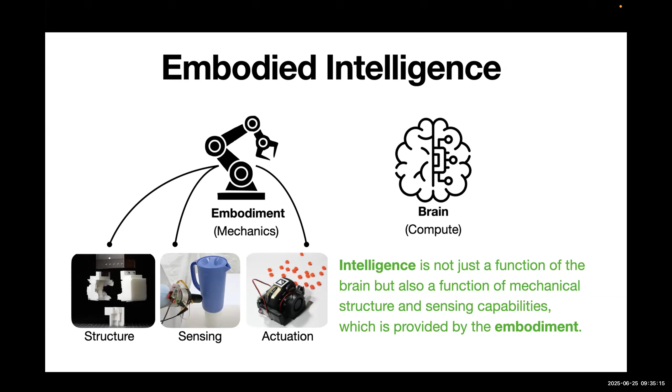So all these other capabilities are actually provided by embodiments, not by the software. And I think the intertwined nature of all these different components makes robotic systems so hard to design and optimize, right? That is why robotics is so hard and we are not solving it yet. So how do we typically approach it? I think the standard tactic for approaching robotic system design is this divide and conquer approach, right? We have a very complicated system. We divide it into different components, and we focus on each component at a time.

And that directly leads to the different specializations in robotics. We have mechanical engineers who learn how to design the physical part of the robots. We also have CS people designing the software part. However, the problem is that this kind of job division does not always lead to the optimal system. More often than not, it actually leads to a lot of complaints from both sides. You can often see the software people complain that your hardware is not precise enough, and the hardware people say that, no, my hardware is precise, it's just your controller sucks.

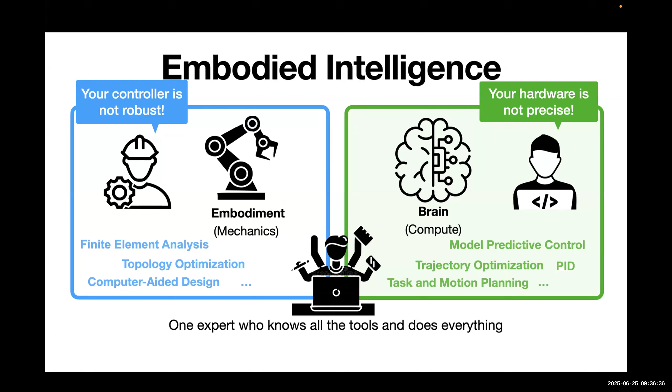And on the other extreme of the spectrum, what we can hope for is that we have this one expert that knows all the tools and knowledge of hardware and software, and there's no problems at all. But of course, this is not very realistic, right? If we require all robotics PhDs to understand all the tools and knowledge in robotics, then they will take forever to graduate. So what is a more realistic approach? I think what we really need to work on as a field is making this hardware design process much simpler instead of much harder. Right? So how can we make it simpler?

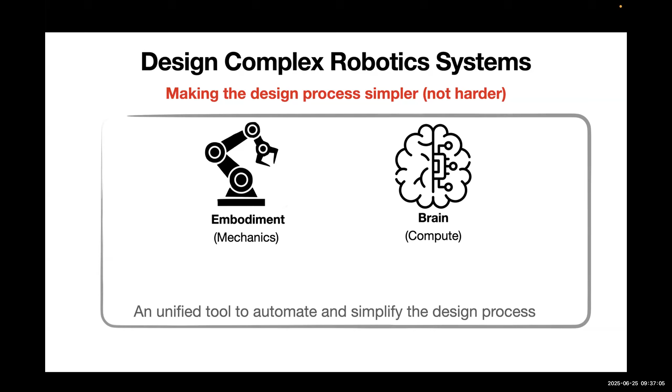I think one idea is to simplify all the tools that we use by unifying them into one single tool, and as a result, engineers only need to learn that one tool. By using this unified tool, we can automate and simplify the whole design process. As you can guess, one good guess is using machine learning as a tool to optimize both software and hardware design. We already see a lot of progress and success in using machine learning to optimize the programming part of the robot. Nowadays, it's much easier to make a robot do a new task through machine learning. The robot will be able to learn. And that is much simpler compared to the classical way of doing it, which is writing an explicit program.

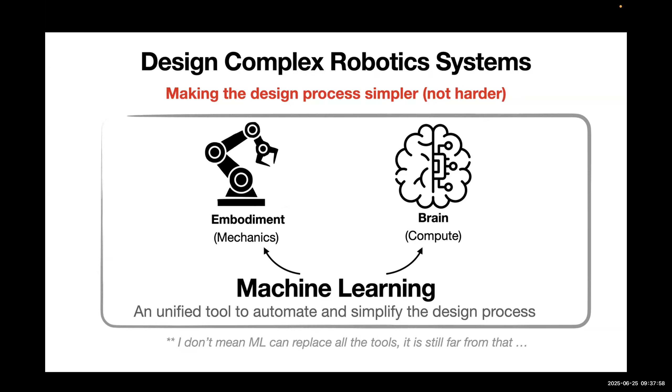So the question now is, can we apply a similar idea to hardware design? Here I want to make a disclaimer: I don't think we are there yet. We are very, very far, right? I think machine learning cannot replace the majority of the tools in mechanical design. But I think it's a really good time to start to think about it, because fundamentally, what machine learning provides us is two very powerful capabilities.

First, it gives us the ability to distill knowledge from large amounts of data. This data can be robots' sensorimotor skills or sensorimotor experience, that's when we're learning the robot policy. And at the same time, the data can be a lot of good and bad hardware designs coming from, for example, simulators.

And the second capability is that machine learning actually provides us a way to automatically optimize a lot of parameters of the system. So what are those parameters? It could be the action parameters, which again is typical policy learning, but it could also be the parameters for the robot hardware configurations. So if you think about it, there's a lot of parallels in these two problems, and potentially the machine learning method can be applied for hardware as well.

So with that kind of idea, we can potentially start a new paradigm for robot design, where the engineer will just need to define the objective, what I want the robot to do, like the task objective, and roughly sketch out the design space for the robot. And then the robots or the machines will be able to automatically optimize their configurations, their parameters in both their action and hardware, in order to give you an optimal system. So that will be a really nice paradigm to reach.

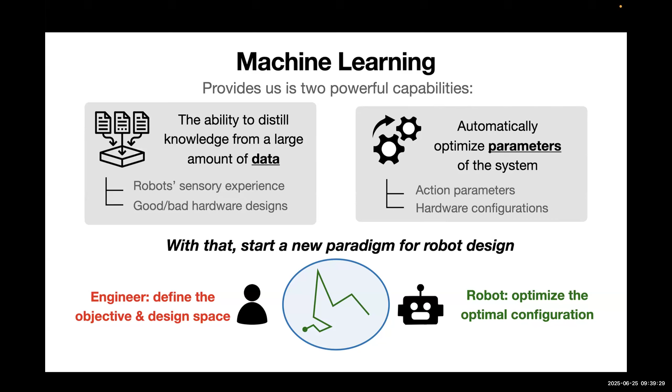So today I'm trying to ground this very big grand vision into a very concrete example. We're going to talk about this very specific task of trying to use machine learning for robot manipulator design. So this is the focus for today's talk. We'll do a case study on whether it is possible.

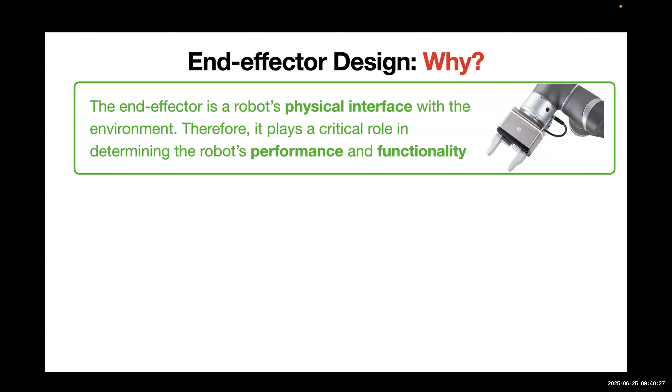Okay, so first you may ask why we care about robot manipulator design. There's so many parts of robots. Why do we just focus on manipulators? Well, if you think about it carefully, the robot's manipulator, which is their hand, is really the physical interface between the robot itself and its environment. So as a result, this interface design critically determines the robot's overall performance and its functionality. Therefore, if you tweak it a little bit, or design it better, you can drastically impact the performance of the system.

So here is just a quick example from our past work to highlight the importance of manipulator design. In many of my past works with Jimmy, we actually use a very simple robot called an Anki robot. It can move around, but for its hand, it only has one lever of actuation, so it can only rotate this one link. But we use this robot to do many different things by changing the end effector shape. If you just 3D print a different mount on the end of the robot, it can lift up the cube, push the cube, toss the cube backwards. And if you put a little fan as the end effector, you can even blow air and clean up leaves. What I'm trying to show you is that even with a very simple robot, if you carefully design an end effector, the robot can do a lot more than we think. So the importance of end effector design.

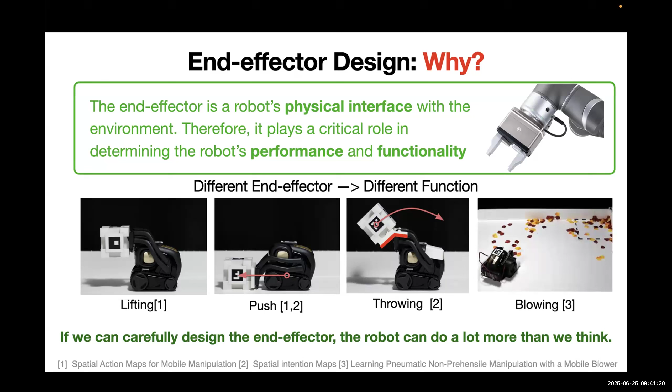Similarly in industry applications, if you go to any automation industry or assembly lines, you will see that almost all assembly lines use task-specific designs of their end effectors. They design their hands or grippers for the task or the objects they are manipulating. There's a lot of benefit from doing that. First, you can easily improve the performance for the task you care about. It can also drastically improve the robustness of the system because it simplifies the system. If you design the correct end effector, the system may not even rely on vision, which makes it a lot more robust. And this type of design is relatively easy to deploy. You just switch out the finger geometry, and the same gripper can do different tasks very reliably.

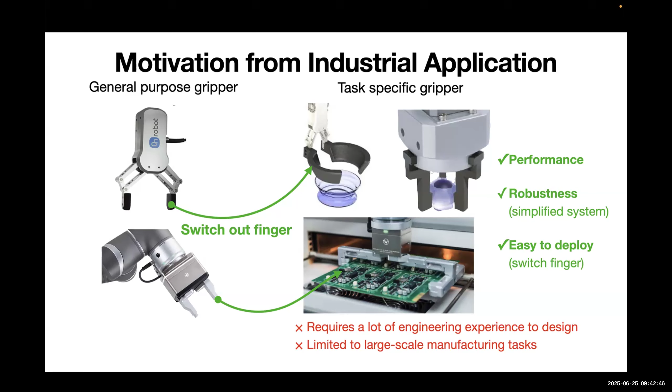But the downside of this kind of task-specific design is that it often requires a lot of engineering experience to come up with the right design and tweak it so that it works in all scenarios. As a result, you often only see tailored or customized end effector design in large-scale manufacturing, where it's more cost-effective. So the question now is, can we automate this end effector design process with machine learning?

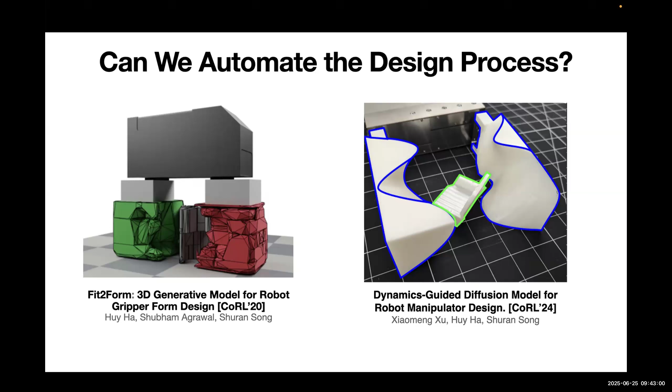To answer this question, I'll talk about past work focused on using machine learning for end effector design. First, I will talk about the work Fit2Form, done by my student Huy, and also the gripper design for grasping of objects. The input of this system is a target object we want the system to grasp, and the output will be the finger shapes for a parallel gripper. We do not change the kinematic structure of this gripper.

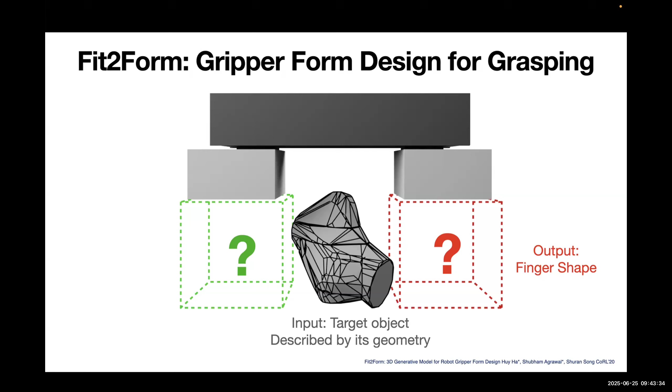We only change the shape of the gripper. And then the objective is that we want the designed end effector shape able to reliably grasp objects, which is the typical grasp success rate that you want to measure. If you close the gripper, it's able to grasp the object. And in addition to that, we also want to make sure that the grasp is stable, right?

So we also want to evaluate that: we'll apply external forces on the grasped object and measure whether the object will still be within the gripper. So this is very important when we actually apply it in a real application. And then the third: if we rotate or translate the target object in this 2D plane, your gripper should still be able to grasp the object.

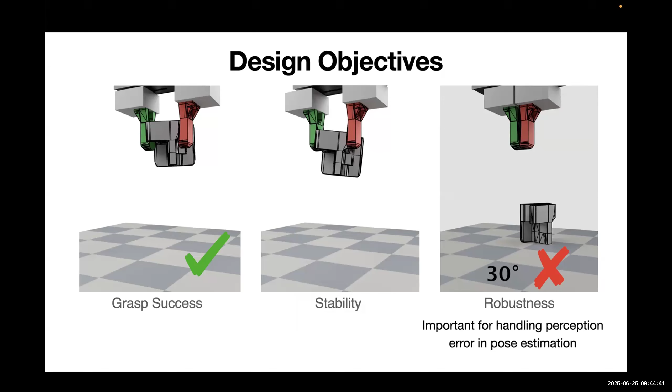So this is actually particularly important to handle perception errors in pose estimation, right? If your target object is not guaranteed to be always in the perfect pose, then this kind of robustness is very useful. You are always able to grasp this object. So this is the design objective that we want to achieve for the gripper that we designed.

And then also we want to make sure that the output of this gripper design is manufacturable, right? We can 3D print these grippers. So we want it to be printable, be one connected component, and be connected to the base. So those are the manufacturing constraints.

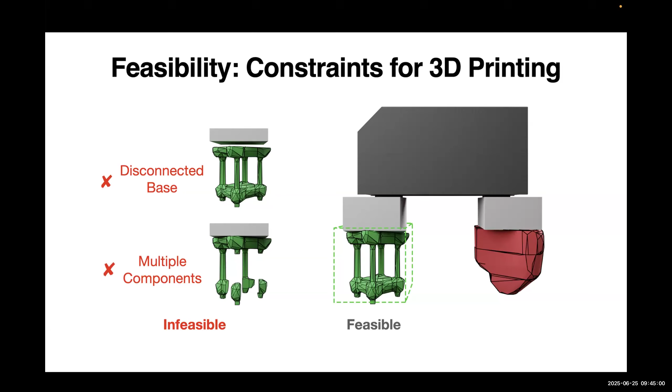Here I'm going to talk a little bit about the high-level approach for how we're able to achieve that. On a very high level, the approach is actually composed of two parts. One part is a generative network that is trying to help us navigate the large design space, and the other part uses a neural network to represent the high-level design objective. In this case, that is all the objectives that I talked about, like grasp success, stability and robustness. So how to do that?

For the first part, we actually use a 3D generative network that helps us generate 3D shape geometries given a target object. Right? So this generative network is basically a 3D neural network that, given a target object, will generate 3D geometries of each of the fingers. And here the geometry is represented in voxels.

We made this decision back then because we want to make sure that the machine learning algorithm has all the degrees of freedom to come up with new designs. We don't want to just parameterize them as primitives and then only do local adjustments. We want them to have all the degrees of freedom to optimize a 3D shape as voxels.

And on the other side, to represent the high-level design objective, we actually trained a fitness network that takes the geometry generated by the generative network and the target object, and directly predicts the evaluation metrics that I introduced earlier, right? For example, grasp success rate, stability, and robustness. We can get the labels for all these evaluation metrics directly in simulation. We simulate the grasp success, and we train a neural network to approximate those metrics.

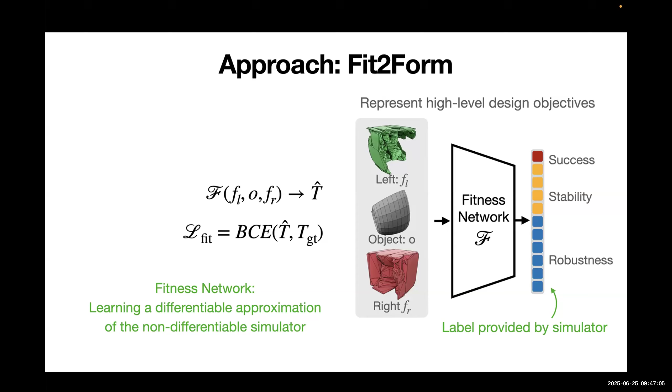So you can see that this is a very similar idea to the previous talk. It's a surrogate model: we train this fitness network to learn a differentiable approximation for those non-differentiable simulators, so that we can get the gradient from this neural network. Once we have these two neural networks, the optimization is actually quite simple because both networks are differentiable, and the generative network is trained to maximize the fitness network's output. You can train this end-to-end together with these two neural networks.

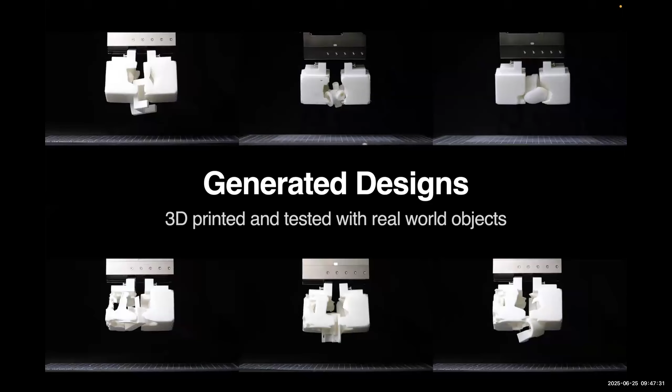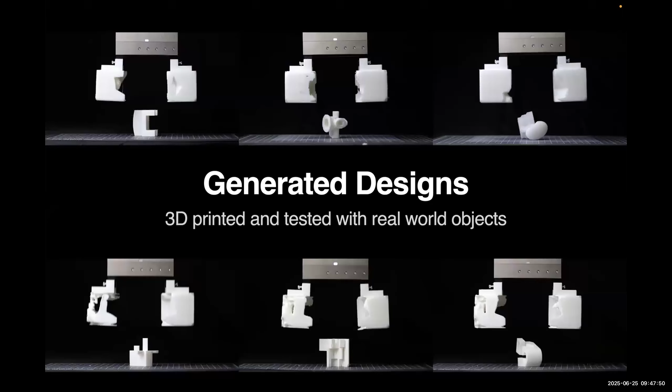And here I want to quickly show you some of the designs generated by the network. We actually 3D printed and tested them in the real world with real world objects. In particular, we tested on objects that are very hard to grasp. Back then there was a paper from Ken Goldberg's group. They generated a set of adversarial objects that are very hard for typical grippers to grasp. So we tested the generated grippers on those objects.

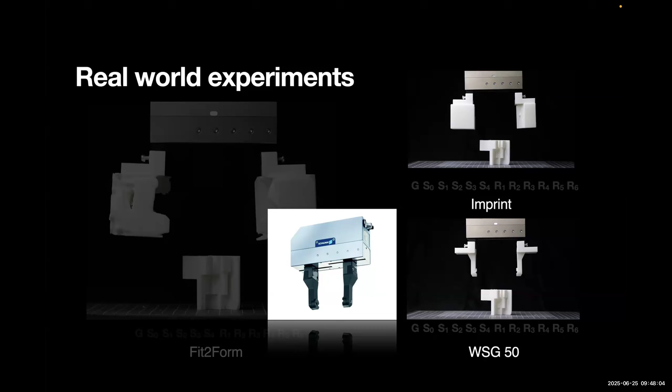And we also did some comparisons with some reasonable baselines, right? Here we compare with two baselines. One is the original design for this WSG 50 gripper. And then we also compared with another baseline called the imprint gripper. This imprint gripper is actually a very typical or standard way people in industry design task-specific or object-specific grippers. It basically just uses the inverted shape of your target object, right?

So intuitively it feels like a good idea, but in reality it's actually quite hard to make it work well, because this kind of design is very sensitive to misalignments of the object. Therefore, it's not very robust to any perception errors. And you will see the issues later.

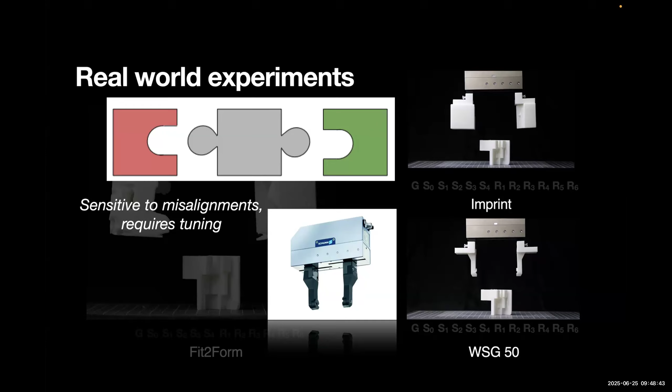Right? So, but if you want to answer the question why those designs are better, we need to actually look at the particular designs. So I'm going to show you a few of those typical designs, or like typical strategies that the network actually figured out to use in order to improve their performance.

So one category of this emerging design that we observed quite a lot in the network is what we call a single-sided scoop. So this name is a little less scientific, but the idea is that if you observe the generation, the finger actually has a flat surface on one of the fingers, and then has a hollow surface on the other side, right? So it's actually very unsymmetrical.

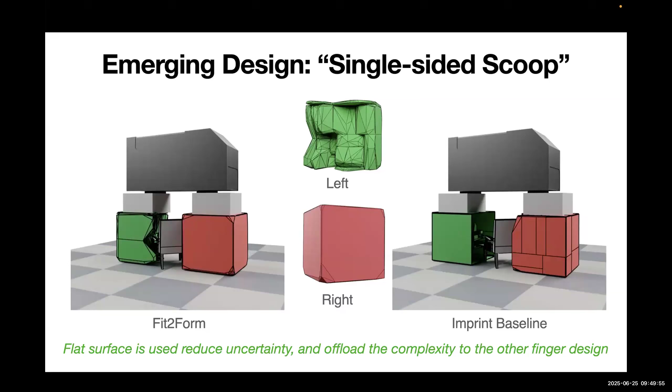And then in the end, when the gripper is trying to grasp the object, basically the flat surface is pushing the object into the cavities in order to grasp the object. So you can see that what the network learned is actually to use the flat surface to kind of help to reduce uncertainties for the grasping dynamic flow to generate the right shape to perform the form closure. So this is one typical design.

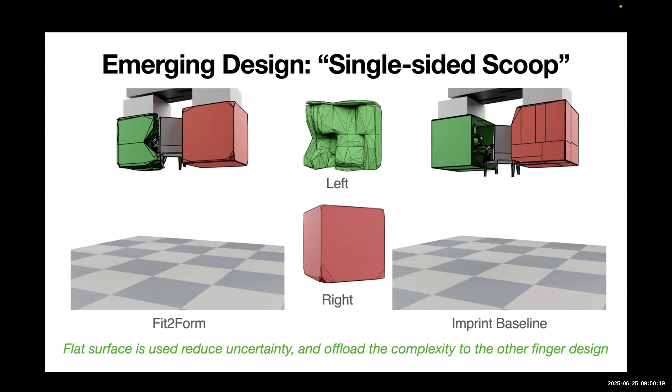And also if you look at objects that are bigger in size, you will see that the generative design actually has bigger space for those bigger objects. It's no longer flat on one side. And also, we observe that when the robot is presented with bigger objects, they also tend to generate those structures on the side of the gripper in order to improve the stability of the grasp.

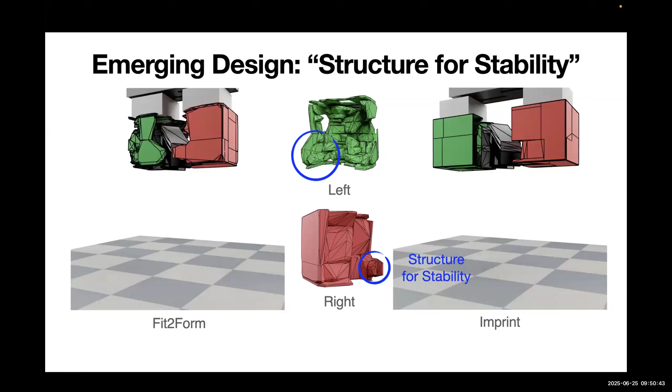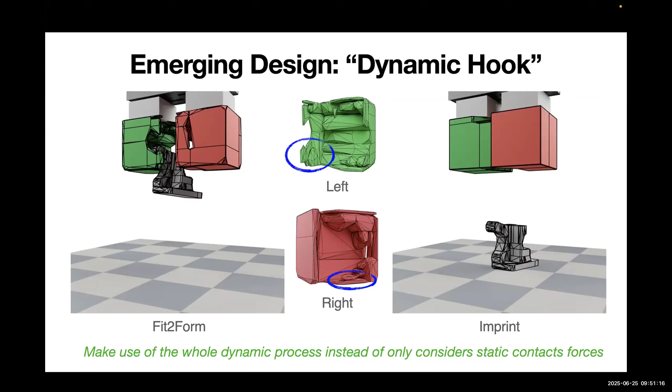So that is the kind of quick summary for Fit2Form. And then if you think about it, it's a very simple system that's dealing with a very simple task. And of course, it has a lot of limitations. Right? So first, I think one of the biggest unsatisfactory parts is that the task that we're dealing with is quite simple. Right? We only consider a single task, which is grasping objects.

And also, for this particular task, as you can imagine, it's not too hard for a human designer or engineer to come up with a better design. Right? Maybe a few iterations will get you there. So a natural question to ask is, can we use a similar method, but tackle a task that's much harder to design, like much harder for human engineers to come up with?

And another very obvious limitation that we figured out in the middle of this project is that the voxel-based representation, although it gives a lot of freedom for the network to generate creative and new designs, is actually really costly and it's not optimization friendly. And so it makes the design space extremely high dimensional and extremely hard to navigate.

So there must be some better 3D geometry representation that still has the degrees of freedom to optimize, but is also easier for the optimization outcome. Those are like two big limitations or issues I have with this work.

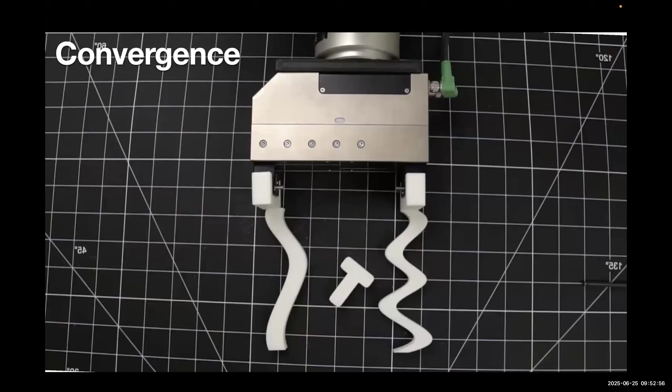So 4 years later, we actually have a follow-up work that's trying to improve both of those issues with a new, very different method. So this is called dynamics-guided diffusion model for robot manipulator design. And this is actually done by Xiaomeng, who is the organizer, and it took us 4 years to come up with the second design. Okay, so here is one of the tasks we consider in this project. It's called convergence.

So what this task does is that given any target object, like for example, in this case a T, regardless of how you put down the object, what kind of pose you put down the object, after the robot squeezes the gripper multiple times, it will automatically align to a target pose. Right, so this is the task called convergence.

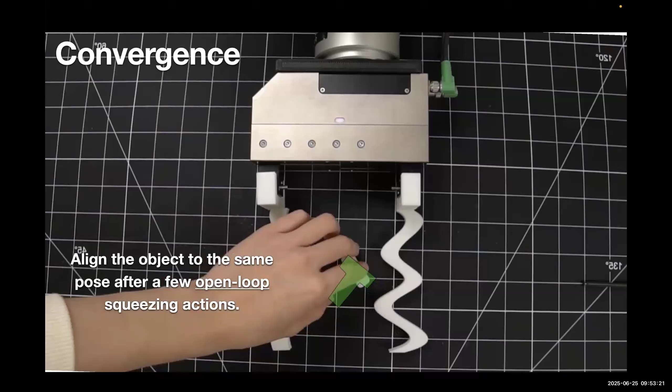As you can imagine, this task can be very useful in your assembly line because when your objects are coming in with different poses, after a few squeezing actions, you'll get all the objects aligned in the same pose. Very practical application in industry. And oftentimes people call it fixtures or other things that basically achieve the same goal.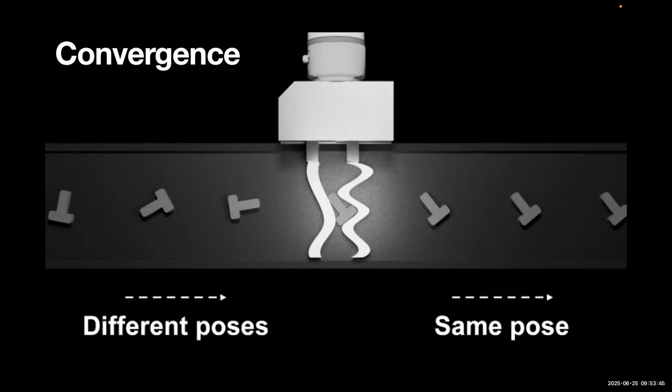So although this is very useful, as you can imagine, and also if you are able to achieve this goal, your downstream task where the robot system can basically just randomly pick up the object does not need to even do any pose estimation because we already know the pose. So this task is useful.

However, it's actually really hard or counterintuitive to come up with the right design. Right? So if you just ask yourself this question, given a target object, what is the finger shape for the convergence task? I don't think you have a good intuition of how to design it. So it does take a very experienced engineer many days or months to come up with a good design, if they ever come up with a good design.

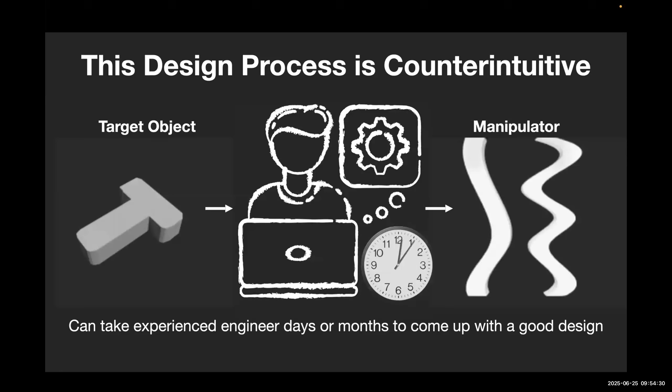So in this project, we in particular pick this task that is hard enough and also useful enough for us to study. And the goal is to automate the whole design process with a neural network. So the high-level idea for the approach is very similar to the earlier fit-to-form project. We still have a generator that helps us represent the distribution of shapes. We also have an evaluator that helps us evaluate whether the design is good. But the actual implementation for each neural network is very different this time.

So for the generator network, this time we made two major changes. One is that we changed the geometry representation from voxels to a set of 3D control points. So it drastically reduces the dimension we need to optimize for, but still provides enough flexibility for optimizing any geometry. And another difference is that instead of training just a feed-forward convolutional neural network as a generative network, we trained the generative network as a diffusion model.

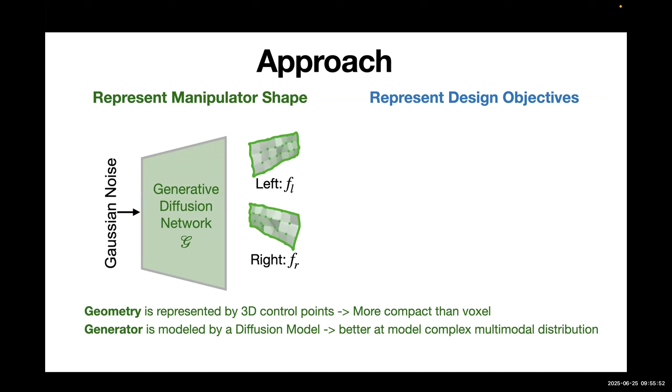We know that diffusion models are particularly good at modeling complex multimodal distributions, which is very good for this design problem because it's very natural to have those complex multimodal distributions appear in your design space. So having a model that's able to capture multiple modes is very critical for the generator. So that is the generator network.

And then for the evaluator that tries to evaluate whether your design is good or not, this time we try to make this evaluator more general. We no longer want it to be overfit to one particular task. We want this evaluator to be able to work for many different tasks. So the idea is we trained a dynamics network that learns to predict the dynamics effect of the interaction. And after that, we can use the same dynamics network to represent many different design objectives. We're going to break down how we do that in a bit.

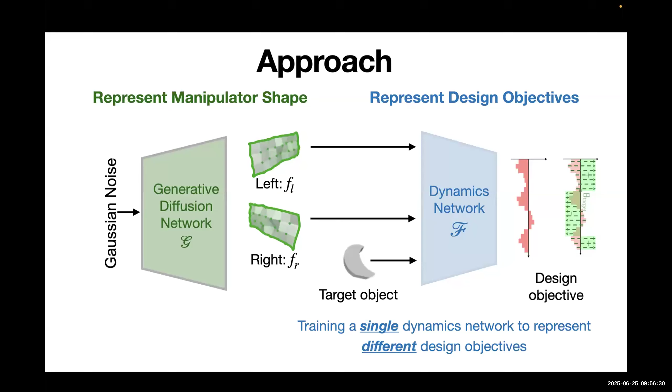So first, let's understand what this dynamics network is. This dynamics network is trying to predict the interaction profile. What's the interaction profile? This is basically an expected delta pose after interactions. To give you a very simple example, say the earlier example, given a target object, let's say it has an initial pose, which corresponds to the x-axis of this profile. After one interaction, the object pose will change, and that will give us the corresponding delta pose change on this profile.

And if you sample different initial poses, you'll be able to get a complete interaction profile for this particular object and this particular pair of manipulators. So after you generate a lot of data in simulation, this dynamics network can predict, given this object and this manipulator, how this object will move after interacting with it. Here I visualize it in just one dimension, but in reality, the interaction profile is high-dimensional. It represents both rotation and translation. Okay, so that is the interaction profile.

And then how do we use it to construct different task objectives? So here, again, is this convergence task. If we want the system to be able to generate a gripper for this convergence task, what we really want is basically, let's say we select the target pose, which is theta target.

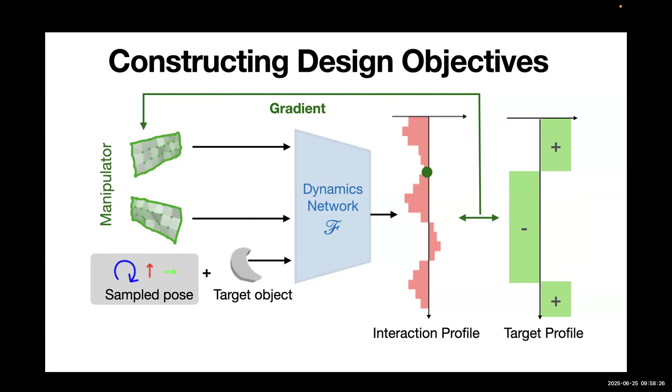And then if the initial pose of this object is smaller than theta, we want it to rotate clockwise. And if the initial pose is larger, then we want it to rotate counterclockwise. Right? So this design objective can actually be easily expressed with a target interaction profile like this. And then if you compare these two interaction profiles, the predicted and the target, it will give you the difference and also the gradient for you to optimize the gripper geometry. Right? So that's how we're able to use the same dynamics network to construct different target tasks.

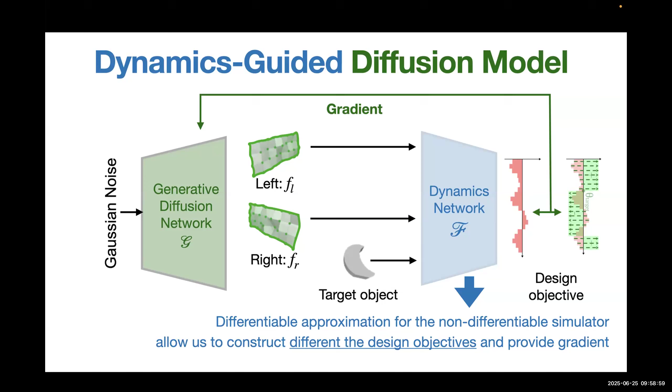Okay, so when we combine these two things together, we basically have a dynamics-guided diffusion model. And then we can use the gradient generated by the dynamics network to guide the denoising process, very similar to classifier-based guidance for the diffusion network. And then here again, this dynamics network is basically our differentiable approximation for a non-differentiable simulator. But this time we'll make it more general so that it can actually be reused to construct different design objectives.

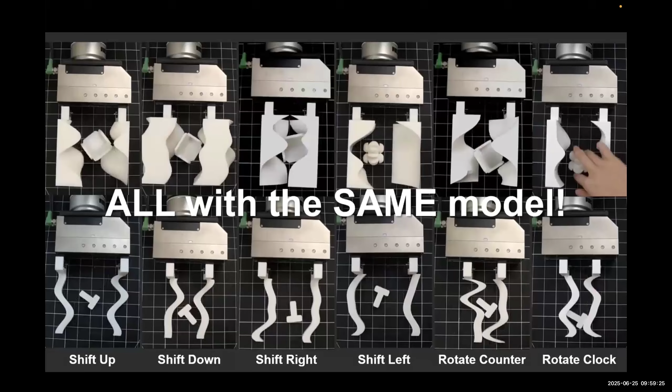So yeah, we can use the same model, both the generator and the dynamics network, for many different design objectives. So here is just a quick overview of the different tasks we test on. So you can design the gripper that always shifts the object up, down, right, left, rotates it clockwise or counterclockwise. So these are all the different tasks. So basically, as long as you can write the target interaction profile, you can use the same network to generate the gripper design.

So just a quick overview. I talked about two works that both are focused on generating robot grippers. And if you look at these two works at a high level, you can see that the role of the learning algorithm is actually very similar. So first, the learning algorithm helps us summarize the design space into a generator network. And second, the learning algorithm is really helpful to represent the design objectives as a differentiable function. In the first case, we represent it as a fitness function that is task specific. And in the second case, we represent it as a dynamics function that can be shared and reused for different tasks.

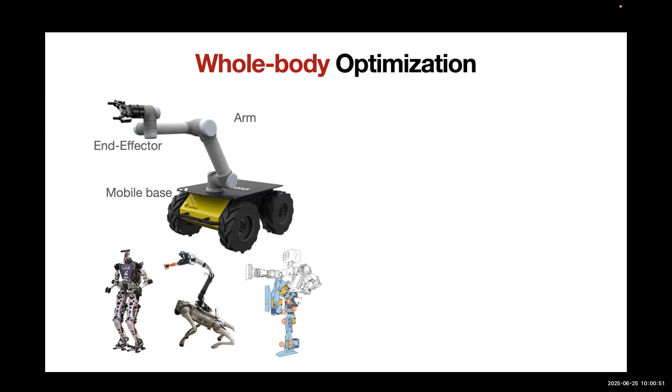Okay, so that's for end effector design. In the remaining few minutes, I want to talk a little bit about what we want to do next, or how we can go beyond just robot end effector design. So I spent a lot of time talking about the robot hand, which is actually quite a small part of the robot. Right, so if you think about a mobile robot, it comes with its arm, its mobile base, it has a lot of other components, which really motivates the idea of trying to do a whole body optimization, considering all the degrees of freedom of the robot altogether. So I think it's probably most obvious to apply those ideas to complicated robots like humanoids or quadrupeds. But what I want to highlight today is that even if you have a very simple system, considering design optimization for your hardware still matters.

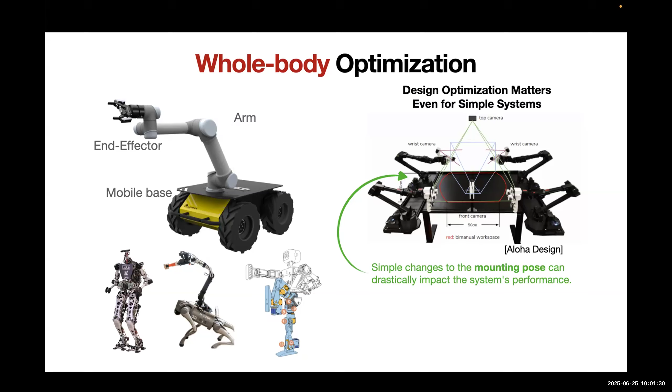Right? So I think many of you have probably used some kind of bimanual setup, like this Aloha design, and many of you probably directly downloaded the Aloha design and tried to reconstruct it in your lab, and it probably works very well. But have you thought about simply changing the mounting positions or the mounting orientations to improve the performance of the task? Actually, it's not very natural to do it with the horizontal mounting pose. If you change the mounting pose a little bit, it actually can improve the performance quite a bit.

And then similarly, how about each individual arm's design kinematics, right? So what if you make some of the links longer or shorter? What if you increase or decrease the degrees of freedom? And I think a more interesting question is: does the design actually need to be symmetrical? I think most bimanual designs are symmetrical, but does it always need to be?

My answer is probably not, because if you think about all the tasks that we ask the robot to do, most of the tasks are actually asymmetrical. And also, if you think about the learning from demonstration paradigm, most people have a dominant hand, and the trajectory complexity that you demonstrate is actually quite different on left and right, right? So why do we need to make the robot hardware symmetrical? So I think a symmetrical design is very easy to think about, but oftentimes it's not really optimized for the particular task.

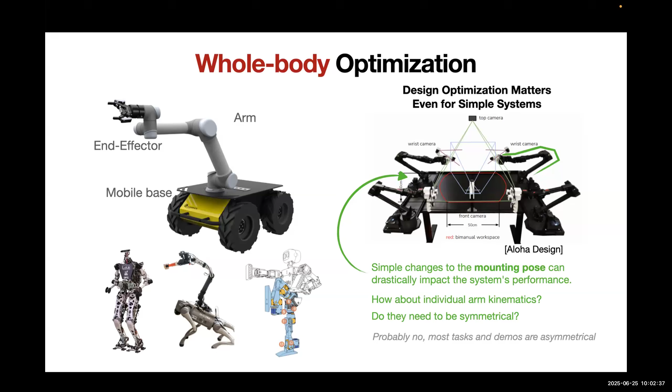So that's its whole body optimization. Another interesting aspect, or an avenue that I think we can think about for learning for design, or just in general for better hardware design, is sensor design, right? We know that in nature, animals, depending on whether you're prey or predator, actually optimize their eye locations to either hide away from predators or to have better depth vision.

Similarly for robots, if you design the robot for very different tasks, like a precise insertion task or a navigation or searching task, the way you mount the camera will be very different, right? So if you ever design a big robot system for a new task, I think the first question you need to answer, and it's also a tricky one, is where to place your sensor, where to place your camera. And that actually critically impacts your system.

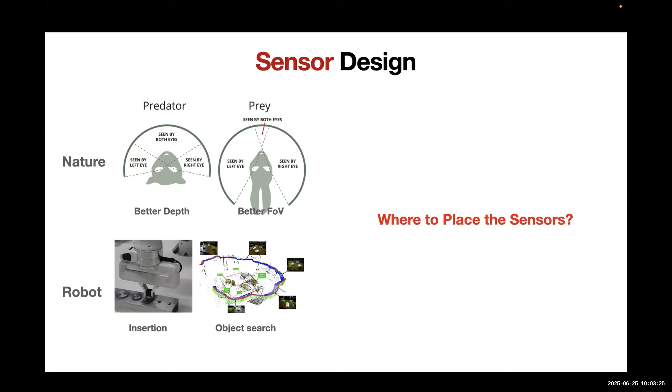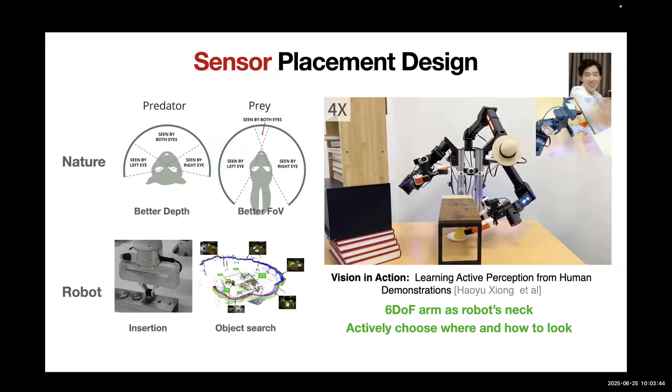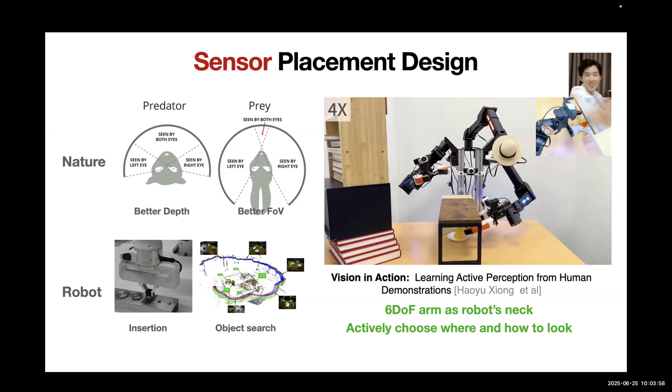So taking this idea, one of our recent works is called Vision in Action. We designed this active robot neck. It can move around during the manipulation process so that it can actively optimize the better camera pose during different parts of the manipulation stage. So you don't need to predefine the camera mounting location at the beginning, but instead you can optimize or learn the proper camera placement in the process.

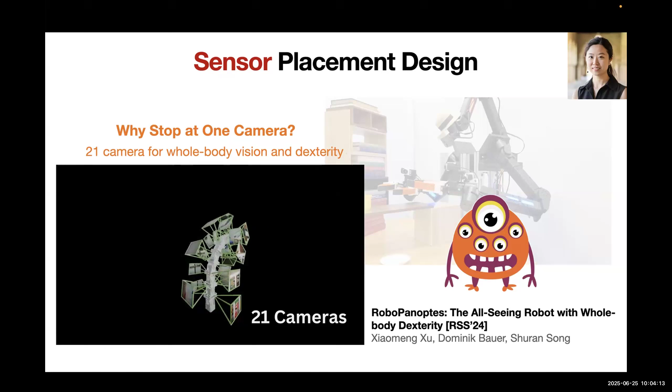And if you take this idea one step further, why stop at one camera when you can install many different cameras on the robot? Today, cameras are very, very cheap. You can get a good camera for $6. In this project, we installed 21 cameras on this very little robot. Because of all these cameras, the robot has whole body vision, which enables new capabilities like whole body sweeping, or getting into very narrow spaces, like opening this box.

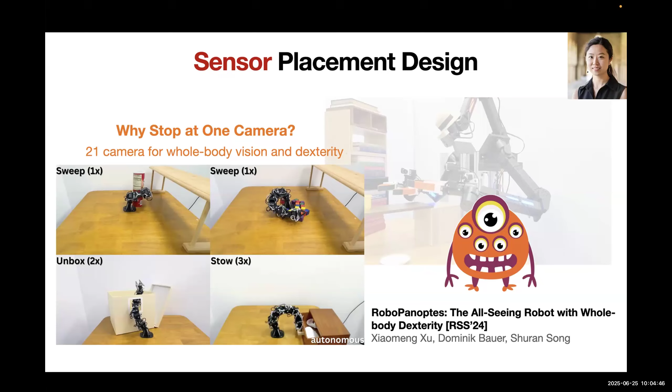If you imagine any other camera placement, like a camera on the ceiling or on the side, you will not be able to do this task. But if you add many more cameras, you are able to do this task a lot better. This project is called RoboPanoptes, which means many eyes on a robot.

Okay, so this is my last slide. I want to summarize what I talked about today. I wish that we, as a field, really think about the opportunities and challenges of applying machine learning to embodiment design or hardware design for robots. The key takeaway I want you to get from this talk is that as a field, we should think about how to move away from this very narrow paradigm

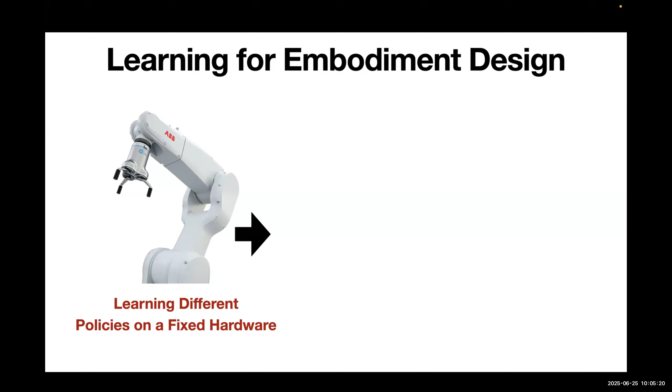where we keep designing different learning policies on a fixed robot hardware, to a new paradigm where we treat the hardware or embodiment of the robot as an integral part of its behaviors. As a result, we can make the robot system a lot more adaptable to different environments, resilient to potential embodiment damage or changes, and more versatile across different tasks.

I always like Transformers as an example for this idea, because it's a perfect example of a robot actively changing its embodiment geometry to adapt to different tasks and scenarios. And I hope that our robots can be just like that.